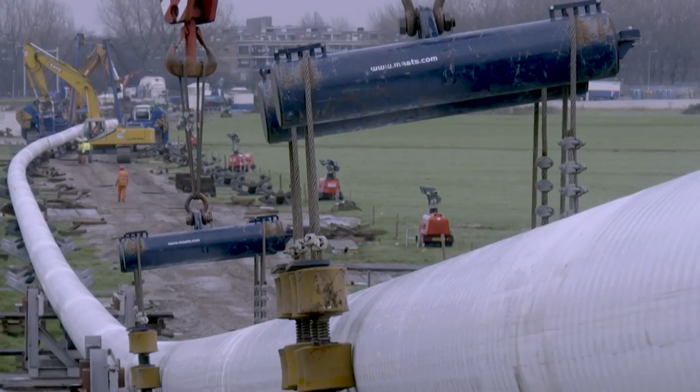So here in the port of Rotterdam, all the elements of the hydrogen economy come together. From large-scale import terminals towards production from offshore wind, towards pipelines that connect the companies in the port of Rotterdam with the production site, but also connecting Rotterdam to the rest of Northwest Europe. So we clearly see already the impact of hydrogen here in the port of Rotterdam, and also we see it accelerating towards the future. It's a huge potential. We work together with different regions and different companies on local, national and international levels, all the way from startups towards international companies. And for example, we have a connection with the Hydrogen Valley in Groningen and also the Kleefse Waard in Arnhem.

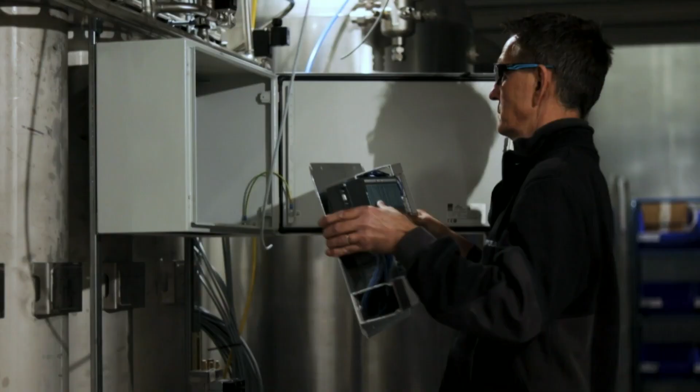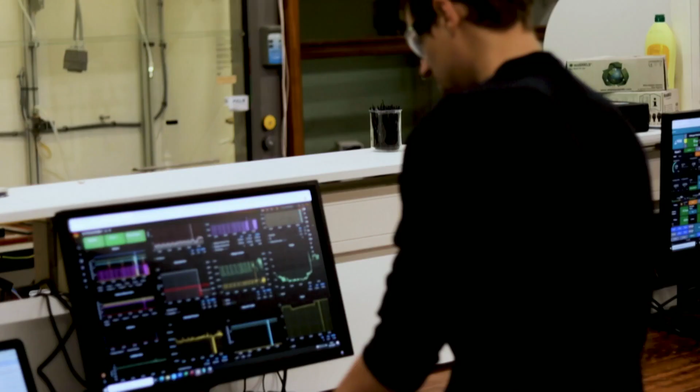We're here in the eastern part of the Netherlands, and more specifically at industrial estate Kleefse Waard. And this is really the pinnacle of the production of hydrogen equipment. Within this region, there's tremendous effort on bringing hydrogen further. Companies like Hygear, who produce hydrogen as a manufacturer, companies like Elestor, who actually produce batteries based on hydrogen bromide, which is kind of an in-between for storage towards hydrogen solutions, and a company like Nedstack, who builds PEM fuel stacks for hydrogen. It's important to build a complete environment to make the next step.

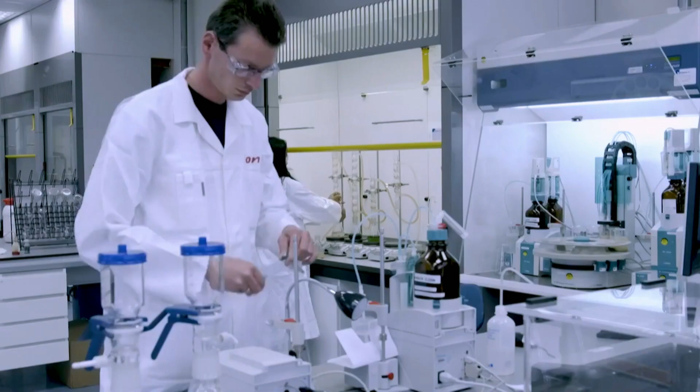So it's a triple helix approach. Governments, research, and industry need to work together to make the next step. The Dutch government is very much committed to support this development. Hydrogen is an important element in our climate agreement. So we will work to create the right conditions, regulation, legislation, safety, financial instruments for innovation, for scaling up.

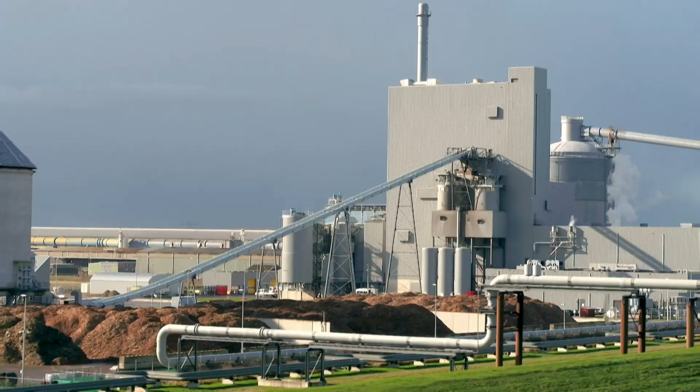Yeah, also here in the northern part of the Netherlands we are very ambitious about hydrogen. Together with Shell and Gasunie, Groningen Seaports as a port authority, we started a project. It's called North H2. And in this project we produce wind offshore, transport this electricity towards the ports, make hydrogen out of it, and then transport it to the customers, the industrial customers in the Netherlands, but also in other parts of Europe. In this project we will generate 10 gigawatts of electricity in 2040, and with this enormous amount of energy we will produce 800,000 tons of hydrogen. And these 800,000 tons of hydrogen will reduce the CO2 emissions in this area by 7 megatons a year.

International partnership is key for the speedy development of the hydrogen market. We are very keen on developing partnerships with other countries. We welcome companies and knowledge institutions from other countries to come to the Netherlands and see what's going on here. We also very much support Dutch companies to go abroad and learn from developments in other countries. As an embassy, we promote and facilitate collaboration between Dutch and Japanese parties. We organize missions, public-private partnerships, webinars, etc. We make use of a good network of advisors and decision-makers from both countries.

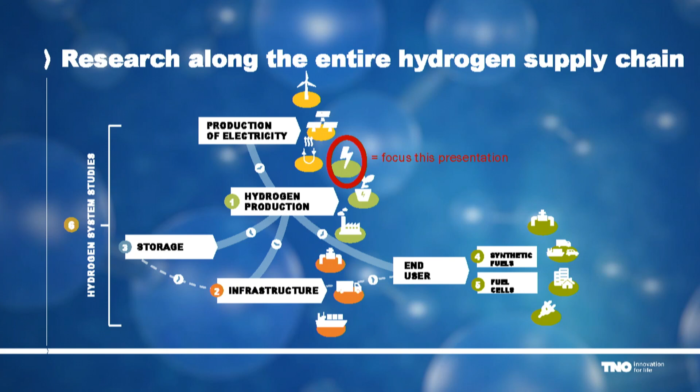Maybe the next slide. And if you look at hydrogen in this slide, you see our activities. My presentation mainly goes into hydrogen production, but obviously we're talking about the complete value chain. So we need hydrogen production, and we need to transport it, we need to store it, and we need a sufficient end use in fuel cells or in synthetic fuels. And that's innovation we are working on together with industry. If you go to the next.

Actually there's only one reason we go towards hydrogen, and that's obviously climate neutrality. Hydrogen should play a key role there for the routes where there's no other option, so where energy saving or direct electrification is not an option. And that's really the key why we should go for hydrogen. And the Netherlands is well positioned because we've got a potential of 300 gigawatts offshore production in the Greater North Sea. And there's only one way we can utilize the complete wind energy: by converting that to hydrogen and putting it in the energy system.

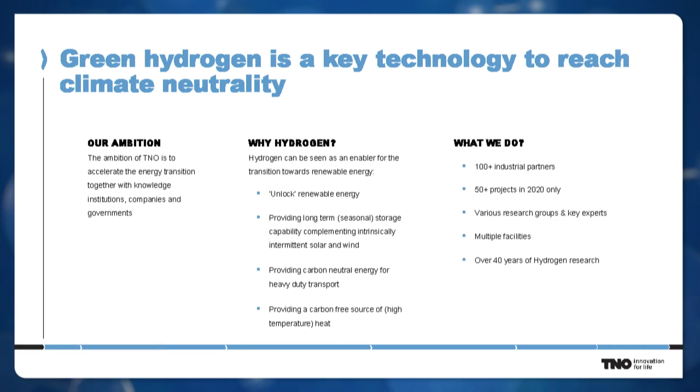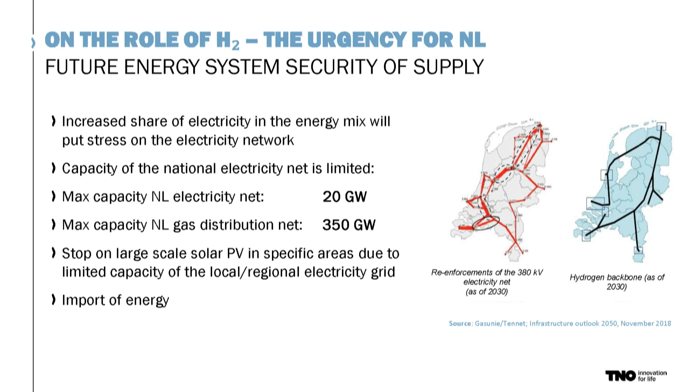And if you go to the next slide, you see the infrastructure challenge. In our infrastructure in the Netherlands, if you look at the electricity infrastructure, there's only 20 gigawatts. If you look at the potential of the gas infrastructure, it's a factor of 15 larger in terms of capacity. And that's the whole reason for what I was just talking about. If we want to integrate all the renewable energy in our energy system, the gas grid is really optimal because it can basically transport a lot of energy in the Netherlands and also to neighboring countries like Germany.

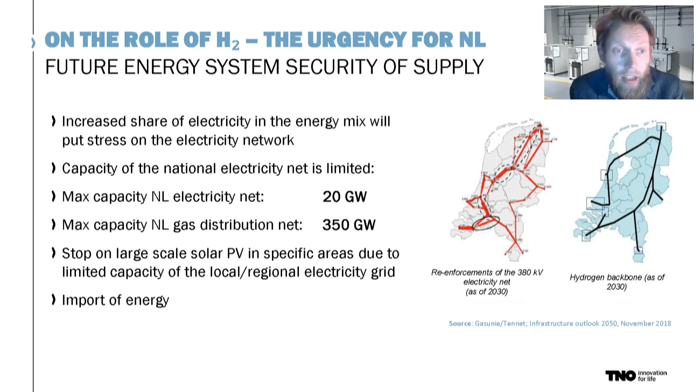And obviously, as we saw in the introduction video, we've got huge ports which are already importing large amounts of fossil fuels, and hydrogen is an option which can replace them. So if we go to the next.

So these are the four main challenges if you look at electrolysis. There are roughly 20 companies worldwide who develop PEM or alkaline electrolyzers, and these are the four main challenges we're looking at right now. If you look at the current market, this year only 100 megawatt electrolyzer capacity will be installed worldwide. So really at the bottom of the S-curve.

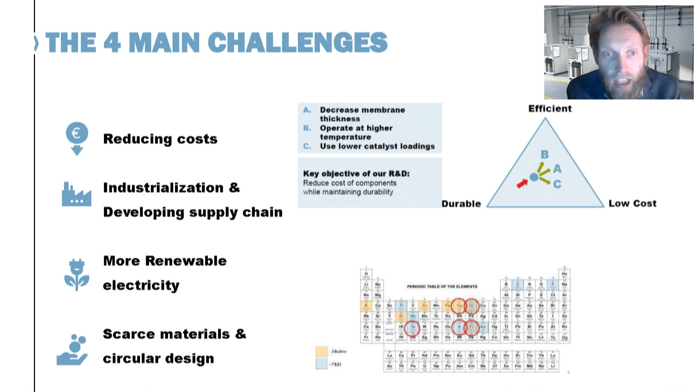So everything's about upscaling. Upscaling because the IEA is thinking of not 100 megawatt, but 60,000 megawatts yearly installed capacity, which is needed. So we need to multiply a factor 600 year on year. So the main targets are cost reduction, obviously, industrialization. We need more and more renewable electricity, and we've got a scarce material thing.

And in our research, what we are doing is obviously the trade-off, because you want an efficient electrolyzer, you want them low cost, you want them durable. And that's obviously a trade-off because if you use cheaper materials, it affects the efficiency. So if you go to the next, I will go a bit deeper into the scarce materials.

Because really, if you look at the PEM electrolyzer, iridium is used, and the availability of iridium is really limited worldwide. If you go to the gigawatt scale, we need all the iridium worldwide to actually supply that for the electrodes in the PEM system, and same for alkaline. And you see different scenarios, and we also looked at different scenarios. What are solutions on that?

So we can reduce the amount of loading we work on from 2 milligram per square centimeter towards 0.2. We can obviously recycle it. We increase the productivity. So there are a lot of strategies, but we really should look at it, because otherwise we're creating another problem. And this report can be downloaded on the website. If you go to the next.

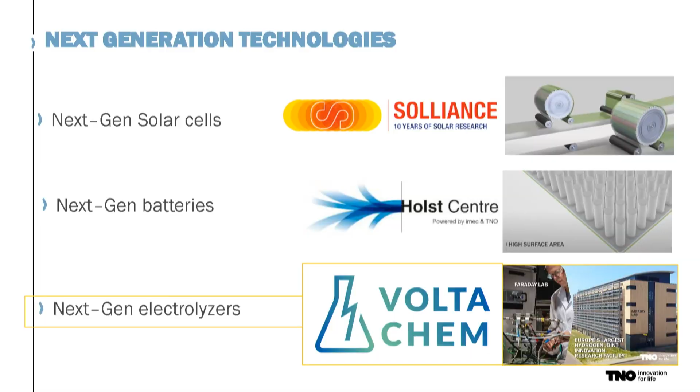So the circularity is an issue. The second one is upscaling. And then we definitely should learn from what we saw in solar and battery, as in solar roll-to-roll, battery 3D infrastructures, because if you use 3D electrodes, your efficiency can go much higher. And that's why, if we use this knowledge, we can develop a next generation electrolyzer.

And then if you go to the next, you get a feeling of the numbers. Here you see the numbers worldwide. Solar is on 125 gigawatts. Fuel cells is 0.1 gigawatt. Fuel cells is actually 1 gigawatt in 2019. And electrolyzer, as you said, 0.1 gigawatt worldwide. And from energy, we're thinking in gigawatts.

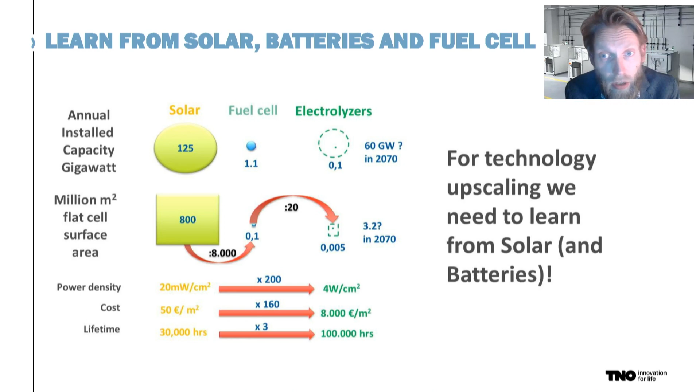If you look at it from a manufacturing point of view, we talk about million square meters of production capacity of the membranes, of the electrodes. And here you see the need for production, and also the high performance quality which is needed for electrolysis. Long lifetime, high current density, the costs are still high, so we really should learn from these technologies for upscaling of these electrolyzer technologies. If we go to the next.

And developing the supply chain is really crucial. And to understand each other, it's really important: what are we talking about? So obviously we've got the hydrogen supply chain, producing the hydrogen towards the end user, but we also have the material supply chain, and that's the blue and the orange boxes.

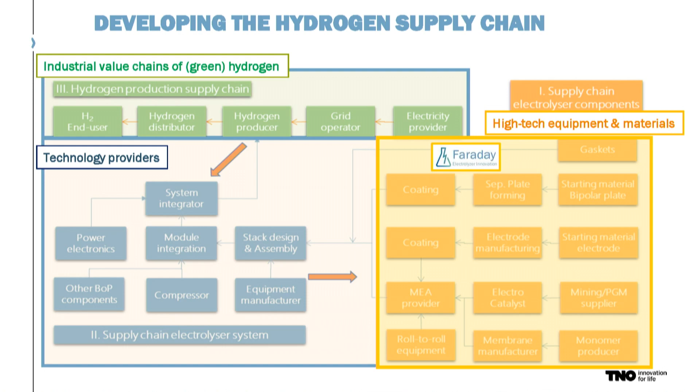So actually developing the electrolyzer itself, the balance of plant, the system, the stack, and if we really go further into the stack, you go to the orange boxes, and there you see the membrane, the electrodes, and even the machines that are actually making the membranes. And the supply chain is not completely developed. Actually, there are 2-3 membrane suppliers in the world. So if we really want to grow this electrolyzer technology, we need more suppliers in this field. And then we go to the next.

Yeah, so this is actually the build-up of the electrolyzer stacks. Those who are in this field know the components, and actually the MEA is the most costly element of the electrolyzer stack. So that's really a focus point of our research, reducing the cost. Really go to ultra-thin membranes, ultra-thin electrodes, which obviously have a great benefit for your efficiency. And then we go to the next.

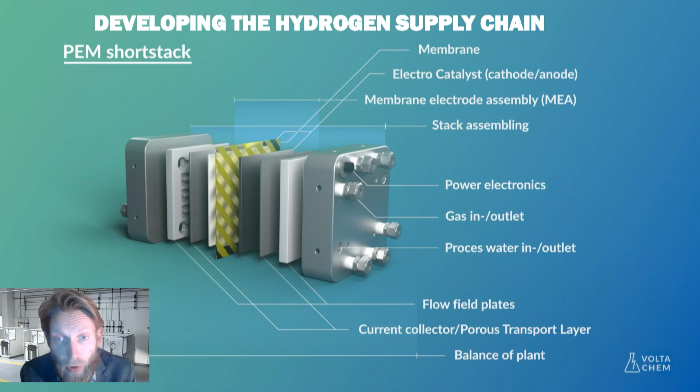Here you see the supply chain and the different partners. And this actually should grow, as we at least should have 5, 10, 15 companies for each material if we really go to the gigawatt level.

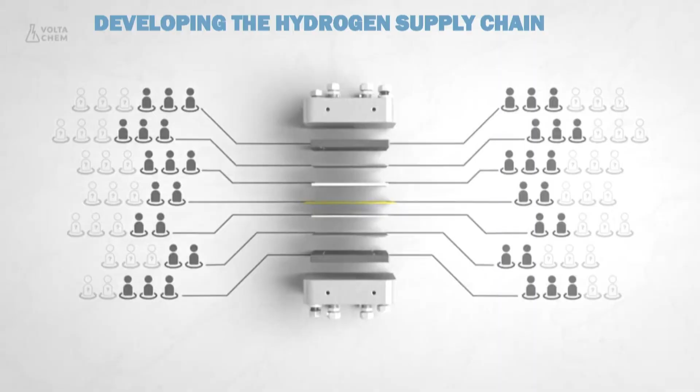And if we look to the next slide. So this is really interesting. Last year we talked to 150 companies in the Netherlands, and we found out that 80 companies in the Netherlands already are active or have capabilities of supplying these materials, the electrodes, the membranes, the systems, actually making these electrolyzers. So we have really good capabilities in the Netherlands.

And we're now talking with Germany, because Germany has some really strong OEMs who already have products in the market, like Siemens, like ThyssenKrupp, like Sunfire. And if you go to the next slide, our vision is really that we're looking at generations, and you see different generations. And the first one is upscaling the current generation electrolyzer technology.

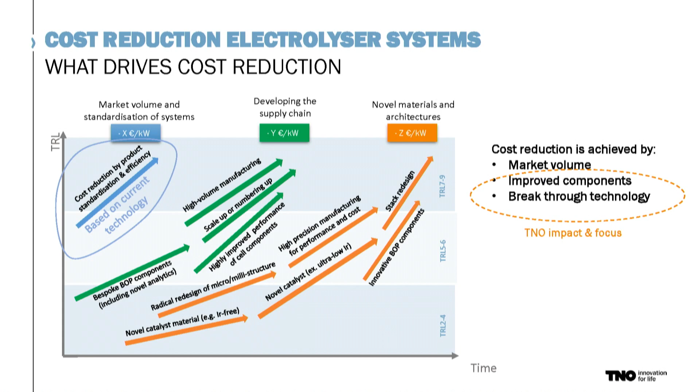So we, in the Netherlands, can develop the novel components supplying the current electrolyzer, but already thinking of next generation electrolyzers, which really have novel components inside, where we have low iridium approaches, where we can get rid of the scarce material issue. Obviously look at breakthrough technologies. And then we go to the next slide, because this is the main challenge.

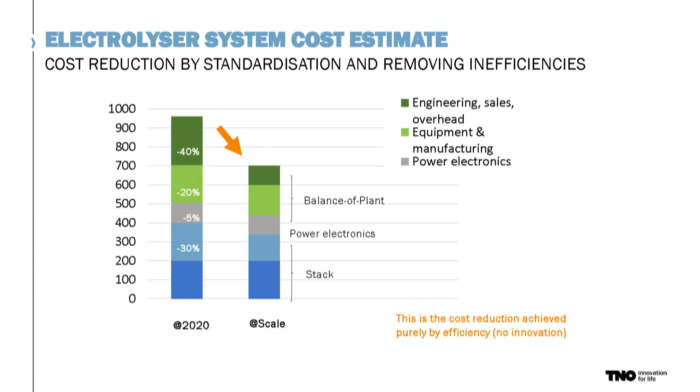If we look at cost reduction, if you go to scale, we can realize 1/3 of cost reduction just simply by upscaling. If there will be more demand, we are going out of the R&D labs and we're getting high volume manufacturing. But if we really want a further cost reduction, so the other 2/3, and then we look at the next graph, then really innovation needs to come in place, because we need other materials, we need other components, we need really thin membranes, for example.

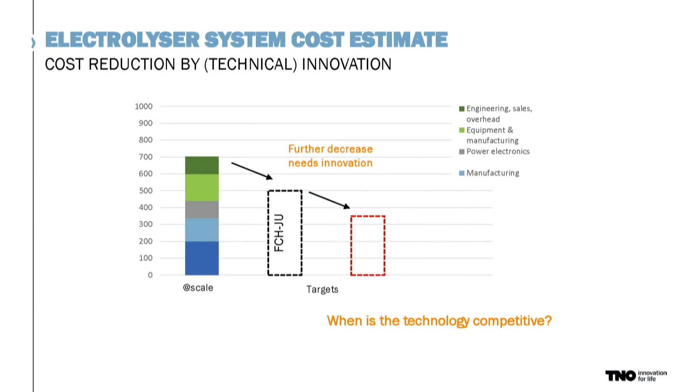So there's really innovation needed, and I think there research institutes are playing a key role, because in the black box you see the Fuel Cells and Hydrogen Joint Undertaking targets, and actually we should go below that. We're seeing current prices are around €1,000 per kilowatt, and we should go to like €350 per kilowatt for a complete electrolyzer system. So if we go to the next, you can think of these optimization challenges.

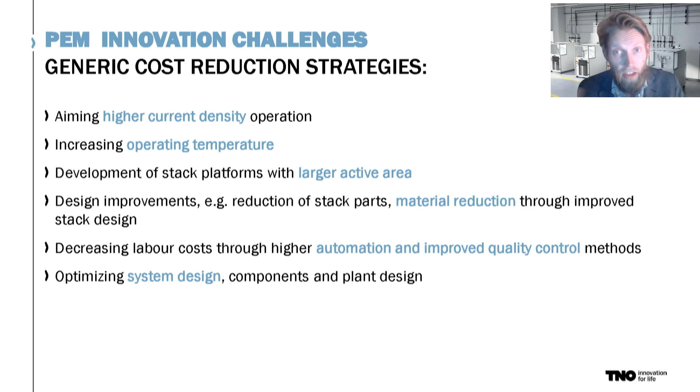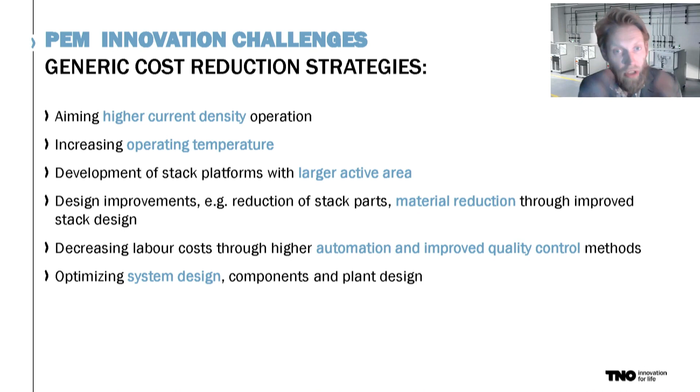So higher current density, higher operating temperature, larger stack size; the alkaline is already large, but the PEM stack is actually getting larger. Material reduction, and the last thing, improved balance of plant design, because now all the solutions are containerized, and if we really go to gigawatt scale, we should focus on complete industrial plants, which will need a complete redesign. So it's not simply stacking, but redesigning a complete system. And then if we go to the next.

So if we really look at electrolyzer growth scenarios, and this is the point I want to make. If you're looking at generations, we're really at the beginning. So the first generation will supply maybe the first 10, 20 gigawatts. But the IEA was saying we're ending up with 3,500 gigawatts of installed electrolyzer capacity worldwide, 3,500.

So we definitely should think in generations now, putting the first generation in the market, but work on the second and third generation with other capabilities. And it can be a PEM or an alkaline stack, but it can even be an AEM or a high temperature solid oxide, or a mix between those two.

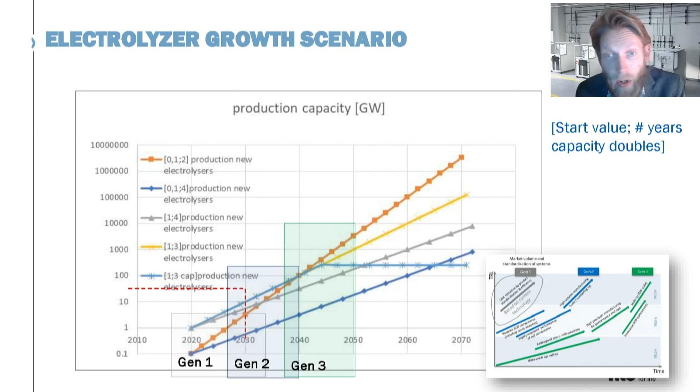European money, investment funds, innovation funds, Green Deal, and we should focus much more on sharing this data, because otherwise this data is only getting to a limited number of companies. And if we increase the data sharing, we can learn much faster. And also the high-tech equipment industry can learn how they can improve their products. And that's actually the main message of this high-speed innovation paper, which can be downloaded as well.

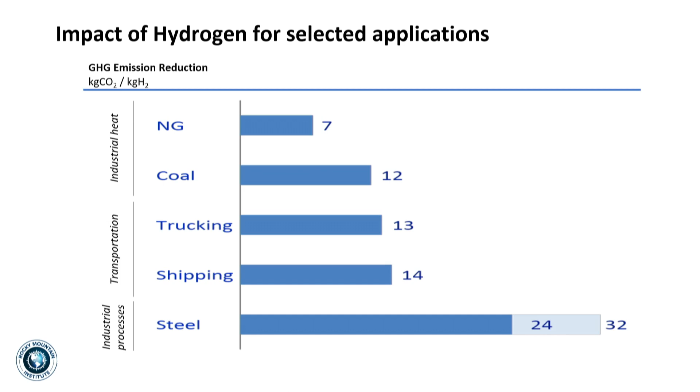So first of all, it's important to keep in mind that while a kilogram of hydrogen is a kilogram of hydrogen, the impact of using it in different applications is significantly different. This chart compares how much CO2 is typically avoided when you use hydrogen for different applications. At the top, you have a like-for-like exchange of thermal content: you burn the hydrogen to create high-temperature industrial heat, where hydrogen could substitute for fossil fuels.

And you can see that the impact from substituting natural gas is slightly smaller than coal, because natural gas is a cleaner fuel than coal per BTU. Now, another similarly effective application area is mobility, exemplified by trucking or shipping. The comparison is very close whether you look at fuel cells with an electric drivetrain or internal combustion engines running on ammonia or other hydrogen derivatives.

Basically what you're doing is transforming the chemical energy in the hydrogen to kinetic energy of a mass that you're moving. So it's not surprising that the saved CO2 emissions compared to oil-based products are very comparable, even though a truck and a ship are very different from a design perspective. But from a physical perspective, it's quite similar.

Now what's interesting at the bottom, as an example of an industrial process, is that hydrogen can also be a reagent or a catalyst in chemical processes. So in addition to getting the heat value out of burning the hydrogen, you get a catalytic effect for the process, in this case steel making.

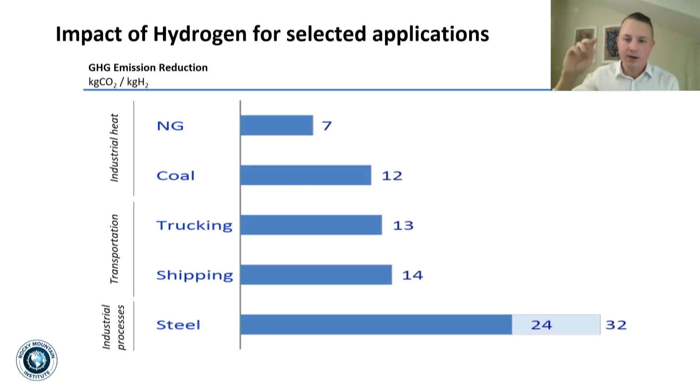The traditional agent is coking coal, and the carbon binds with the oxygen in iron ore, and you get CO2 emissions. Instead, you take hydrogen to bind with the oxygen and you get water, and that gives you a significantly higher impact per kilogram of hydrogen than in these other applications. Next slide.

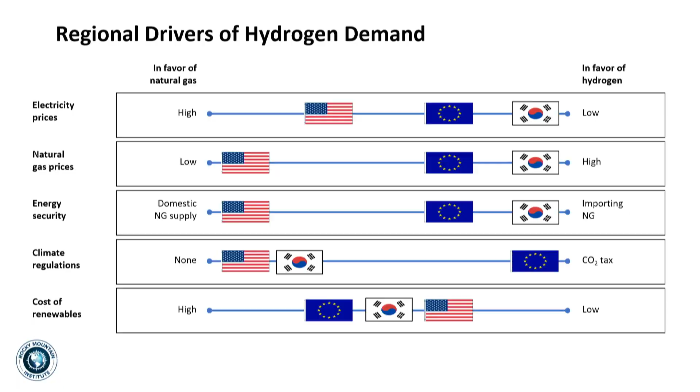Interestingly, at the bottom, I would say, the US in contrast, it's not squeaky clean here, right? So the US also has fantastic renewable resources. I think the challenge is that they're really co-located with where you also have the world's lowest natural gas prices. So in places like Western Texas, you have solar and wind clearing at negative prices, literally, because you have production tax credits for wind. So you can sell the electricity at negative prices and still make a profit.

But you also have fracking assets that are also clearing at negative prices, which basically means they're just flaring it because it doesn't pay off to put it in a pipeline and move it to the load zones on the coast. So that's a bit of a challenging situation, of course, from a competitive perspective. Next slide.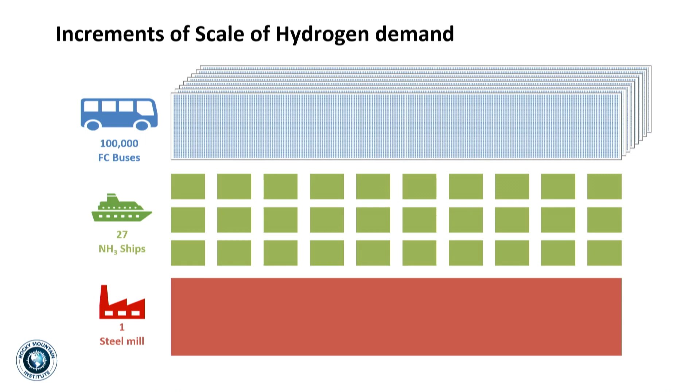So I think that goes a long way in terms of saying, how can you think about aggregating scale to a point where you can motivate this gigawatt scale of production. I think our conclusion here is simply that it's going to be very challenging to get to this scale purely with on-road mobility applications. So you need to get engaged with heavy industry and port clusters and all kinds of combined off-takers to secure sort of lock-in demand at the scale we're talking about, right? Next slide.

So what I'd like to round off with are 3 challenges that we see are at the very core of scale up. So what are the 3 things that are holding back investment? So one thing is considering these different increments of scale. When you build out demand in increments of scale of 5 orders of magnitude less than the typical generation asset, and then you put in pipelines to move the hydrogen, which probably is in the 10 gigawatt equivalent of scale, you suddenly get a very unbalanced utilization of these assets.

So typically when you put solar into a power grid, you know that you can have offtake for that power because you're putting it into a very large market. That's not the case for hydrogen. You're putting it into a very nascent market. So if demand and supply capacity and transmission capacity are not matching, and they're ramping up in different staircase-shaped curves, and some of them are more linear, you'll have massive utilization volatility of assets. And that's just a strong challenge for project finance and trying to understand what the cash flows of these assets will look like after they go into the market.

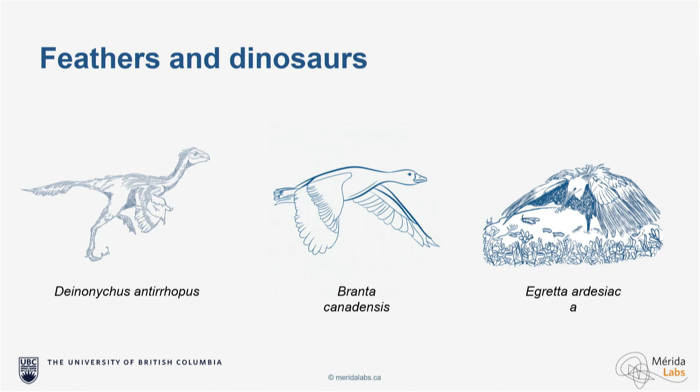The drawing that you see there is by my daughter, she is actually great at drawing, and one time we were looking at a book on evolution and so on, and we came across this picture of a feathered dinosaur. And very quickly we got into the conversation of how the first feather had nothing to do with flight. In fact, the first animals that had feathers on them could not fly. Then, of course, what you see in the middle is the Canadian goose, a very symbolic bird for us Canadians. And of course, that bird is using the feathers for flight. But what you see on the next picture is the black heron from Africa. And what that bird is doing is using its wings as a canopy to fish.

So by putting a kind of a canopy on the water, the fish congregate under the canopy and the bird can fish. And the only point I want to make is that in the same way that the first feather was not meant for flight or fishing, I think the first energy system applications are going to unravel innovations similar to the one we have seen from the industrial and then the IT revolutions.

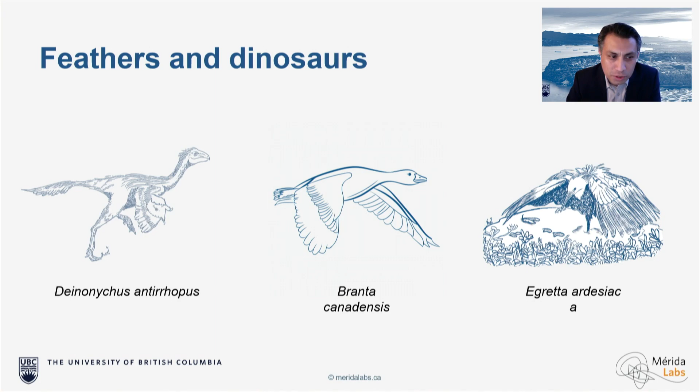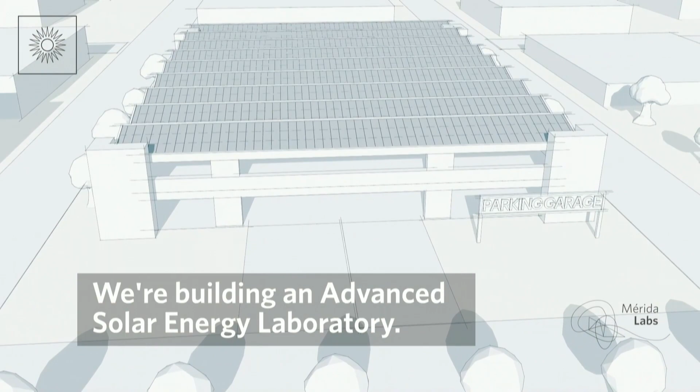So we are taking the parking garage, as I said, and we are going to add the solar array. And then we want to aggregate as many electric vehicles. We already have 70 or 90 charging stations on campus, but we want to aggregate as many electric vehicles as we can in this single building.

And then we are going to make the recharging infrastructure for those vehicles reversible. So the vehicles will be able to both charge from the grid or the solar array and then return power to the grid when needed. And by using only a small percentage of the battery capacity and without significant additional investment, we have created a large battery on campus that then can be used for intelligent energy storage.

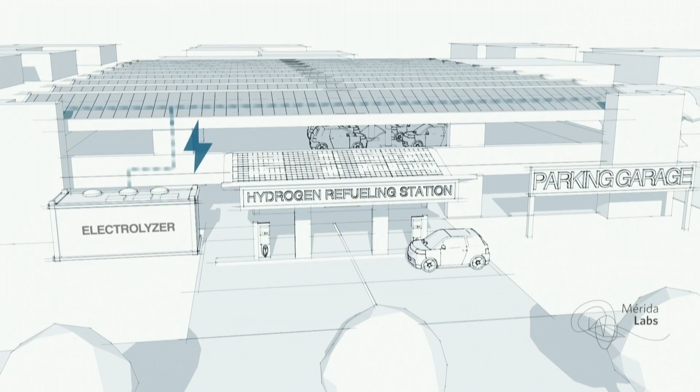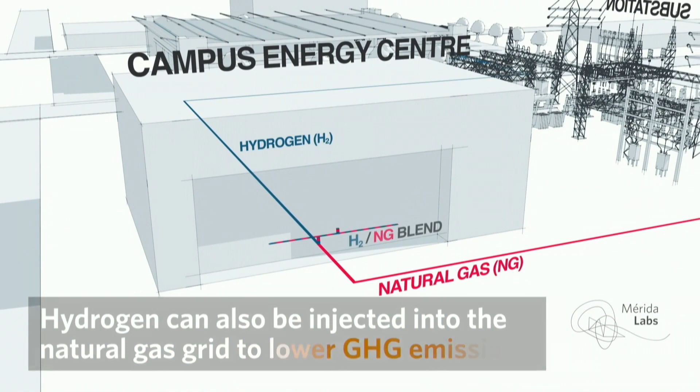Next to the parking garage, we are going to build a hydrogen refueling station, which is going to use an electrolyzer. And that refueling station, of course, will be used to fuel heavy and light duty vehicles on campus. But part of the hydrogen, we also plan to take and inject into our campus energy center, which is a building that hosts 3 natural gas boilers, which we plan to run on a blend of natural gas and hydrogen, or maybe replace one of the boilers with a fuel cell technology or a pure hydrogen boiler technology.

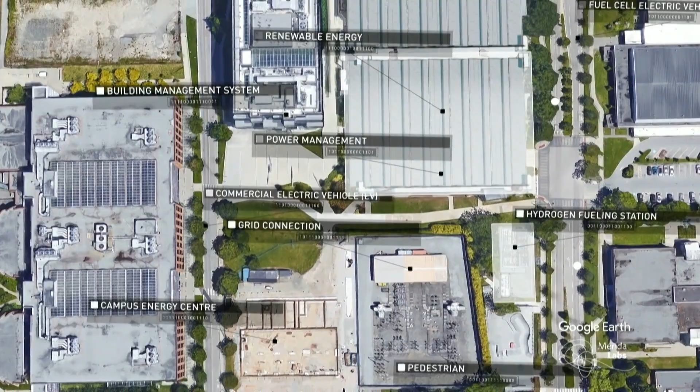Of course, once all this infrastructure is operating, we will need to connect and monitor it. In September of last year, we became the first 5G campus in Canada, and we are going to use a mixture of the Wi-Fi and 5G technologies to connect all these separate pieces of infrastructure. And we plan to develop digital twins on the cloud. And once we have learned the business cases and the safety and cybersecurity issues with this technology, of course, you can then transplant these results into other parts of the city or other applications.

The Port of Vancouver, as you may know, is the largest port in Canada and is poised to grow significantly in the next few decades. So some of the learnings that perhaps we can have in these integrated energy systems can be translated in the form of control tools or monitoring software and so on.

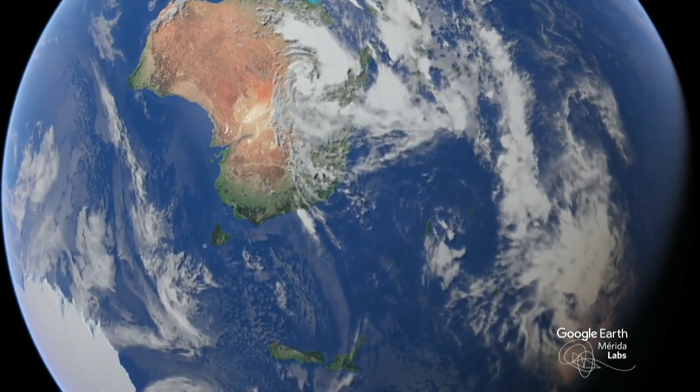And the international piece is very interesting for us. So we are in discussions, and before the pandemic, we were in the process of capitalizing on our partnership with Australia. We have some very good partnerships there, and we would love to have similar partnerships in the Netherlands and in the rest of Europe.

So if we could go back to the presentation, please. I'll just quickly show you just a few glimpses of some of the technology development that we are working on. So on the hydrogen production side, we are looking at blue and green pathways. So on the blue side of things, we have a thermal cracking technology for methane that basically bubbles natural gas through a bed of molten metals. And then by virtue of cracking the molecule in that way, the product of that reaction is solid carbon. So basically you still produce carbon, but you do not produce carbon dioxide, and you produce a solid carbon material that could perhaps find markets for different applications.

The other piece is supercritical water electrolysis, and that's basically electrolysis of water at supercritical conditions. And there are a number of reasons to explore that area. But one of them is that, of course, it is much easier to pressurize a liquid than it is to pressurize a gas. And if you electrolyze the water at high pressure, you may reduce some of the compression costs associated with fuel delivery.

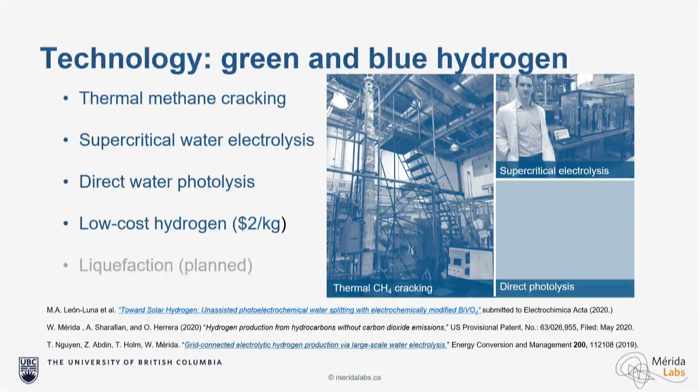The next one is early stages. We are just starting it, and we just published or submitted the first paper. And that's basically direct water photolysis, where we split the water molecule by shining light on catalyst materials without generating electricity. The efficiencies are, of course, very, very low, but that could be a game changer because you would avoid the need to generate electricity. The first pathway gives us a cost for hydrogen under $2 a kilogram, and we are in the process of scaling the prototype up with some partners.

One area that we have not started, but that we would love to collaborate in is liquefaction technologies. If we are talking exports, I think the cost of liquefaction is going to be one of the barriers. If you go to the next slide, please. The other area that we are working on is some very sophisticated and advanced models to start adding some intelligence to the decision-making of infrastructure deployments.

So one of our first models looks at the geographic distribution of refueling stations based on population and vehicular demand and so on. We have started with only light-duty vehicles, but we have run the models now for heavy-duty vehicles, and we are in the process of preparing the relevant publications.

The other area is to start evaluating the effectiveness of policies. So one of our publications tries to evaluate the different policies for hydrogen in terms of how many kilograms of CO2 could you avoid per dollar of subsidy, or how many dollars could you reduce the price of hydrogen by per dollar of subsidy. And you can follow the links if you're interested.

So I think I have my last slide coming up. And, going back to the dinosaur and the feathers, I think the first phone was not meant as a movie delivery device. The first car was not a telecommunications center on wheels with very large batteries. And I think the first cities, the assets in cities that were meant to just maybe hold cars for parking, can now become intelligent participants in city scale energy transactions.

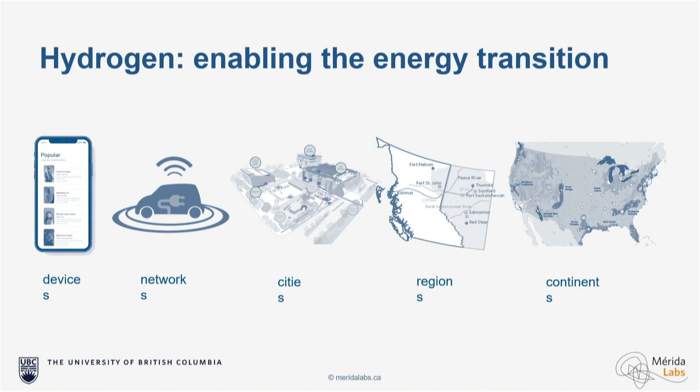And the software tools and the understanding as to how to optimize those types of systems is one of the areas that we are working on. The final comment I would make is that in Canada, we have a very interesting opportunity between the provinces of Alberta and British Columbia. Alberta has a lot of natural gas resources, and it also happens to be sitting on one of the largest underground formations on Earth that could provide significant storage capacity for carbon dioxide.

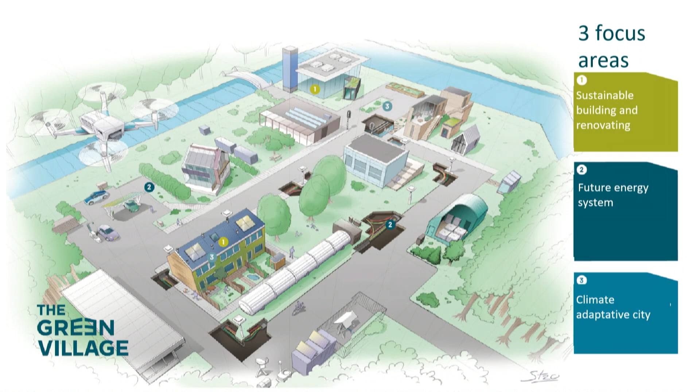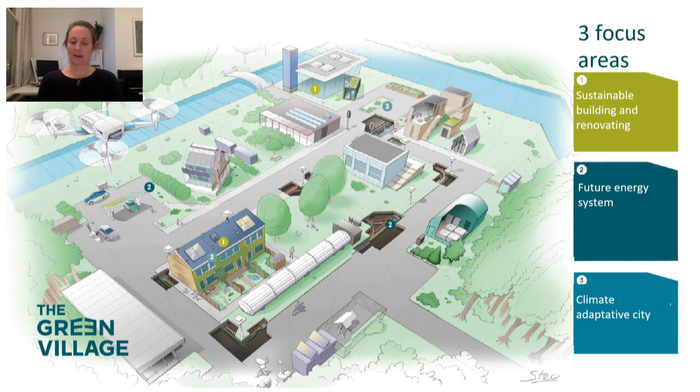So here you see the 3 focus areas of the Green Village. So we try to work on these 3 topics. One is climate adaptation, the other one is sustainable building and renovation, and the third is future energy systems. And the hydrogen projects which we have are part of that last topic. So since 2017, we have had over 80 projects using our Living Lab. And 3 of those projects have hydrogen aspects. So next slide, please.

And what the grid operators are trying to solve is how can we make new working processes for hydrogen, because it's not the same type of gas as natural gas, so we need to change our work processes as well. And they also use this project to educate their gas experts, because working with hydrogen is completely different than working with natural gas. So this is a place where they can get some experience and actually work with this new gas, and also get enthusiastic about it.

They also try to solve many questions about hydrogen. For example, won't this hydrogen cause noise in the pipes when it's going through? Or can we work with this gas, which you can't smell? Is it safe enough, or do we need to add something so we can smell it? So next slide, please.